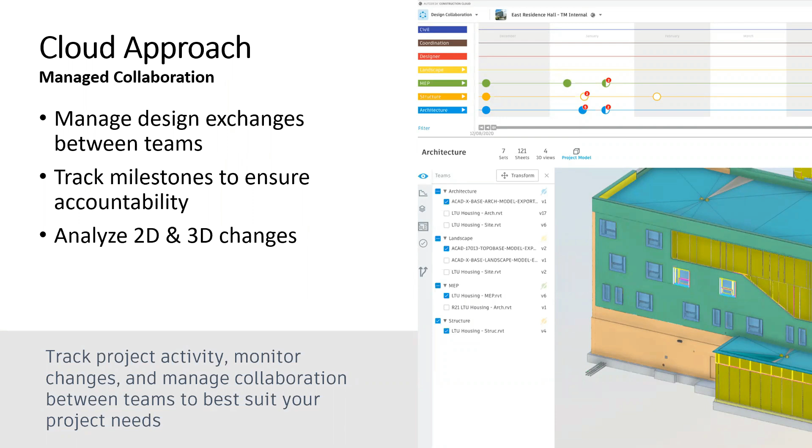So if we take a look at what that looks like from an Autodesk Construction Cloud perspective, that's the Design Collaboration module here. If we imagine a live project scenario, we've got our folders set up, the teams are working away and they're publishing their models into the cloud, whether it's DWG files or Revit models, Plant 3D, Civil 3D, etc. They're all working away in this common data environment.

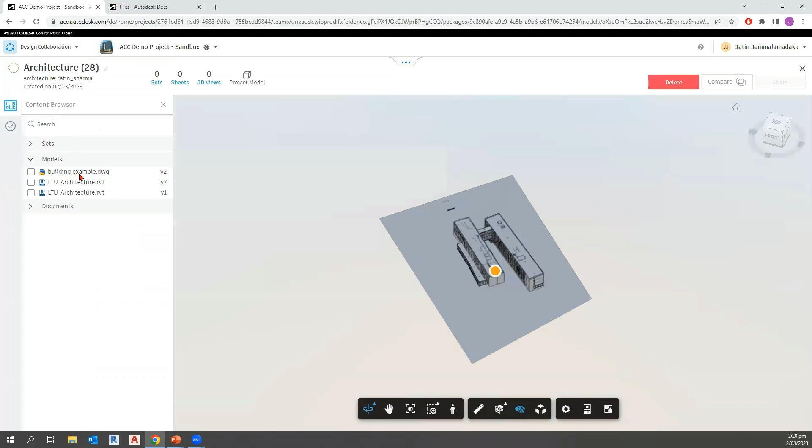And if I click on the models section here, you can see I've got different models available. It works with DWG, works with Revit, works with Civil 3D and Plant 3D. So this is my Revit model, for example. I can take a quick look, make sure everything's okay. I can do things like measure tool, section analysis, etc.

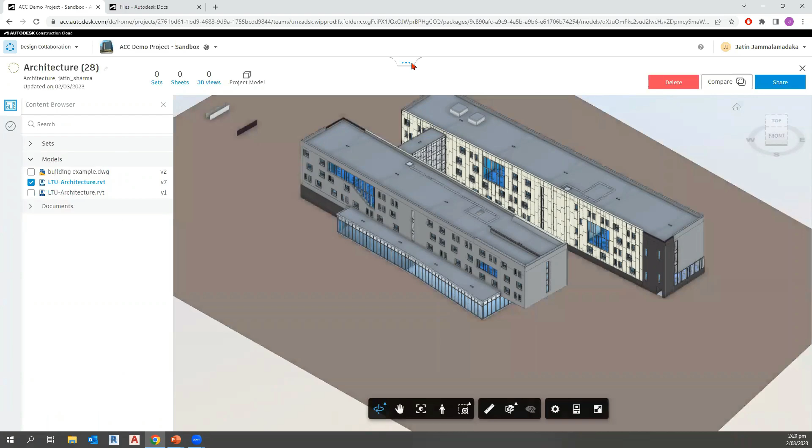And if I'm happy, I can just click on this little square and hit the save button. When I hit the save button, it's going to go ahead and save this package. Now, if I look at this timeline symbol, you can see here under the architecture stream, I've got a node here which says, hey, you've created a package on the 2nd of March, 2023.

If I hit the share button, I can give it a name, I can give it a description, and then once I hit the share, this will now update to say to all the other teams, hey, architecture has shared their model, it's time for everyone to take a look at it.

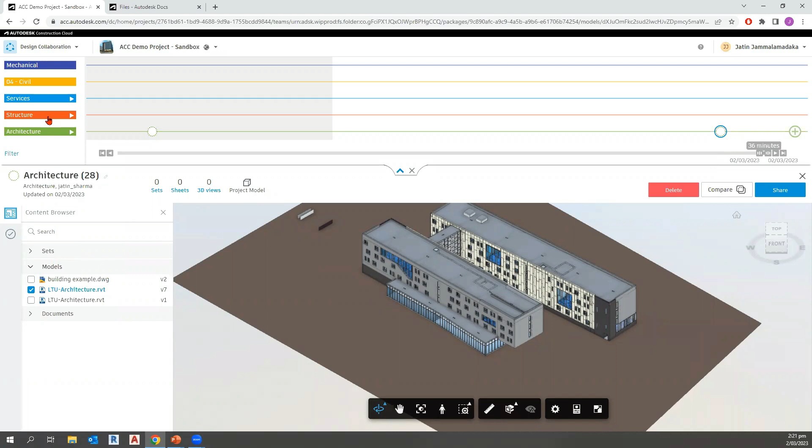So what would happen is that, let's say I was part of services. I know that architecture have shared their model. Let's go back in time a little bit, let's say that they shared on March 24, 2022. I can click on this node, so this package, and take a look at what they're sharing.

I'm doing all of this in the cloud without corrupting my model. I can click on this model. I could even, if I wanted to, hit compare. And what compare does is that it helps you visualize changes between the last time, for example, architecture shared their model with their latest version, just to verify if everything's going correctly.

So I could hit this compare button over here, and I could say, well, you can see here between version 4 and version 5, there aren't any changes. So I wonder why the architecture team are sharing their new version. I could go back in time if I wanted to as well, and say, well, what's the difference between version 3 and version 5? So the model that they shared on the 22nd of April, as opposed to the model that they shared on the 24th of March. Let's take a look.

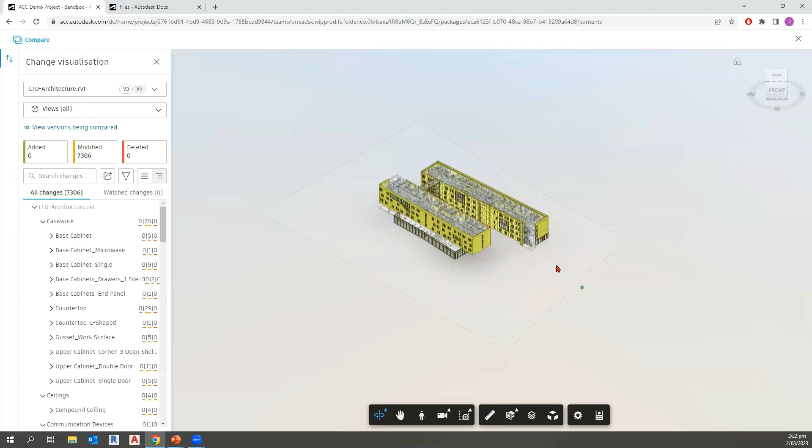So I can click on show changes. Again, I'm doing all of this in the cloud, right? So this is why this cloud-based approach is so appropriate. I'm being able to analyze, slice and dice my data without actually having to go into something like Revit or Civil 3D, etc.

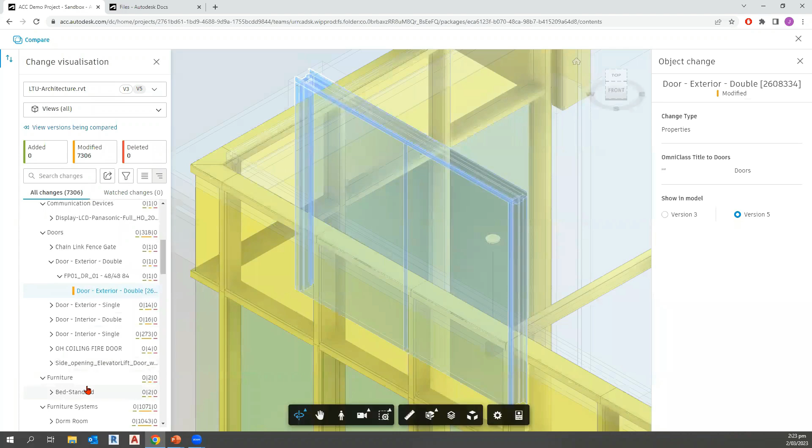So I can see here there's about 7,000 different objects which were modified. I can go take a look. So I could click on any door, for example, and see what was changed. I could take a look, for example, this bed got changed, etc. I could even go backwards if I wanted to. So if I click on this compare again, let's go all the way back to version 2.

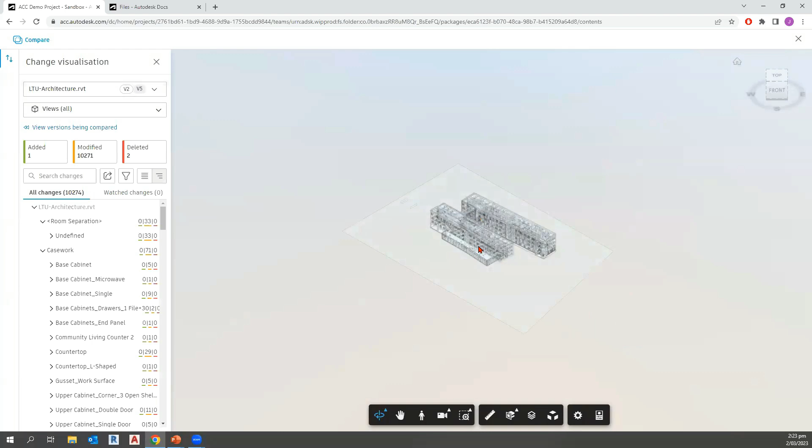For example, there's about 10,000 changes here, and I can hit show changes and it will start calculating all of this in the cloud. Again, hardware requirement is not a problem because it's all happening in the cloud. I can see between version 2 and version 5 of the architectural model, about 1 component got added, 2 got deleted, and 10,000 other objects got modified.

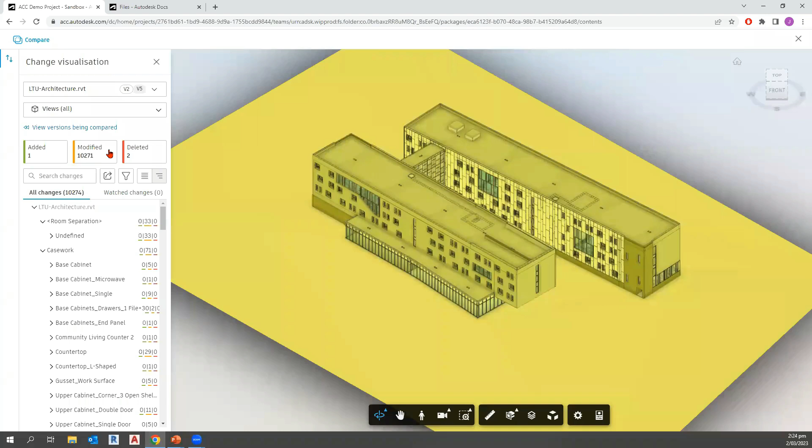If you take a look at this model, if I had to manually figure out what exactly got added, it would take me forever. But I can just uncheck these 2, and I can say, well, I want to know what actually got added. And that was just this 1 door here. So there was this 1 door change in this entire model. The cloud environment has enabled me to figure out what got changed.

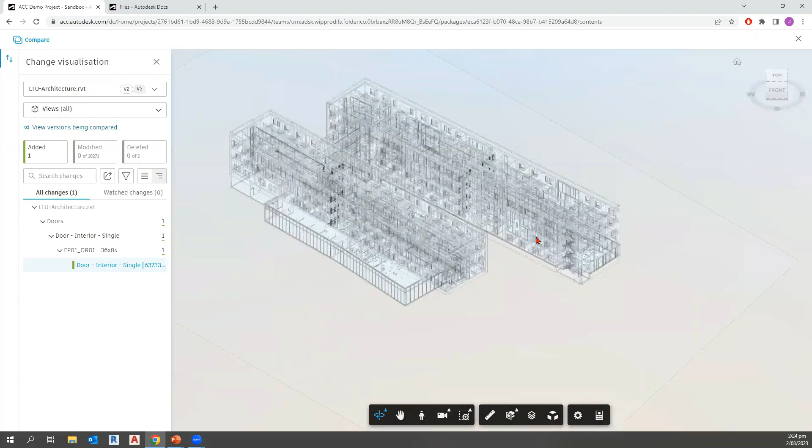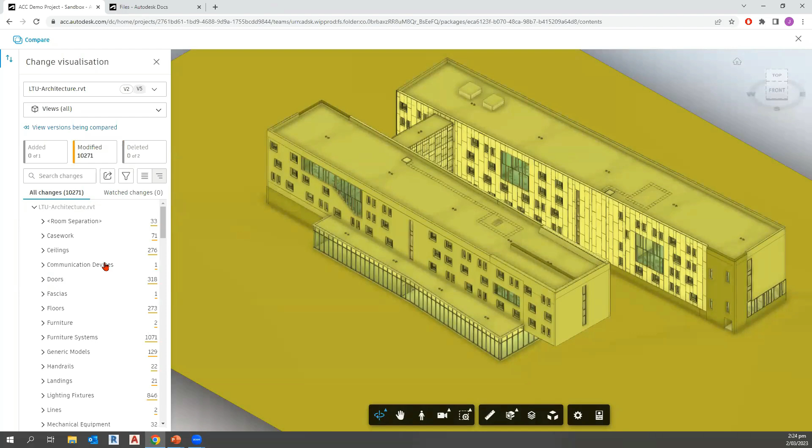Similarly, same thing with deleted. So these 2 water coolers were deleted in the latest version, but they were showing in version 2. If this feels a little bit overwhelming, like, let's say I'm really interested in modified, but there's 10,000 different things that are being changed, well, how can we make this a little bit better?

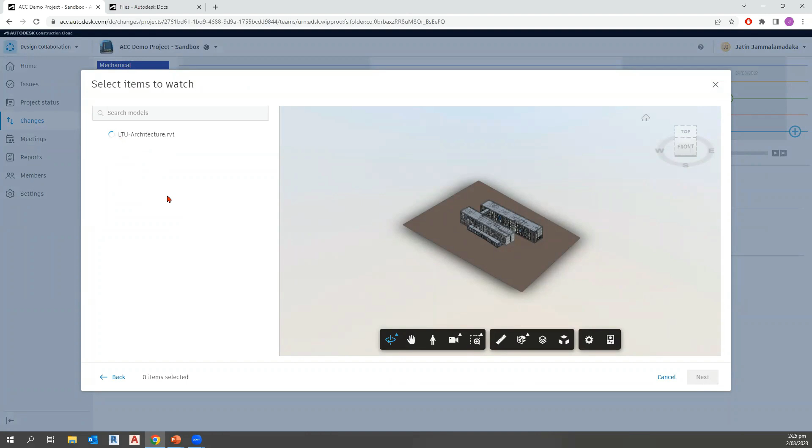One of the things you can do is leverage something called changes over here. So you can create something that we call watch groups, where we can say, hey, I'm only interested in, for example, the architecture model, and I'm only interested to know if certain parts of the architectural model are being changed.

So for example, if I'm only interested in, let's say, foundations or even walls—okay, I'm only interested in the walls. So what's happening here is that I can select all the walls, hit next, and the next time any changes happen to these walls, I'll get a notification.

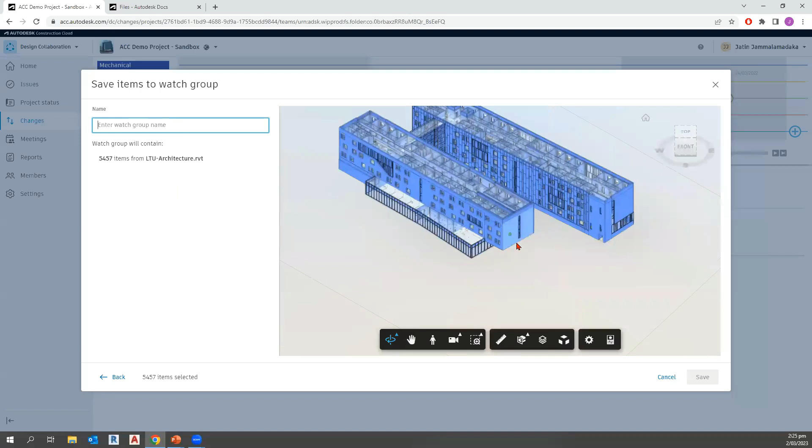So you can take a high level using the compare button over here, or you can dive a bit deeper using changes and creating a watch group. And once you've created some of these watch groups, you can even incorporate it back into your BIM meetings as well.

That's how design collaboration at a high level typically gets used. If you're worried about wanting a little bit more automation—I want to know, for example, when the structure team or the architecture team are sharing their model, because we don't get notifications of this—that's a big problem, you can leverage this button here called email notifications. If you turn this on, you will receive an email every time a package is shared or consumed.

So if you wanted to, you can start introducing some of these automation tools, such as email notifications. You can also introduce another automation tool, which is around schedule publish. You can turn this on and it's a controlled permission, but if you do, you can schedule it to say, well, every Thursday I want the system to automatically publish what we've done, let's say at 3 p.m. on a Thursday, automatically publishing what we've done in Revit into design collaboration. So all this now is becoming available, which wasn't possible using the traditional approach of shared drives or local servers.

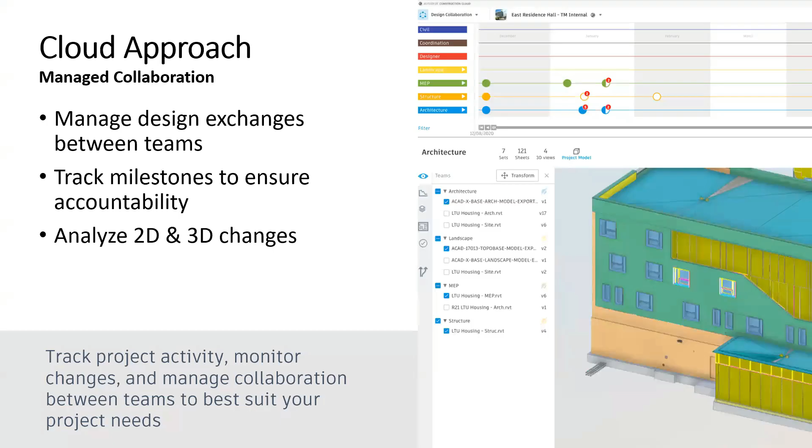Now that we understand the BIM models are in the cloud, and like I said, it works for Plant 3D, Civil 3D, not just Revit, once all that's in there, the entire project team can be involved in the clash detection and resolution process. You can identify issues and try to solve them without waiting for coordination meetings. The cloud environment automatically detects clashes whenever the models are updated, groups them by objects, and from there you can create and assign issues. The module responsible for this is called model coordination.

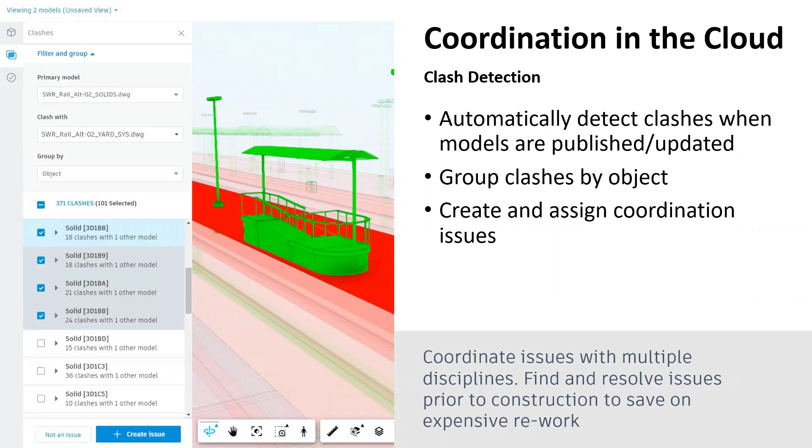There's a bit of miscommunication around the model coordination workflow, so I thought I'd create this graphic to use. From a workflow perspective, you have your different consultants, and what they do is upload their models into the Autodesk Construction Cloud environment. When they do this, the cloud environment will automatically start conducting the clash detection process—as soon as the model gets updated or uploaded into the environment, the clash detection process starts happening.

So once that happens, and you grab a cup of coffee and come back, you can start to view all of the clashes in real time. Once you do this, you can decide: can I resolve the issues I'm seeing in the cloud clash detection process? If yes, I can just upload a new model, it will go through this process again, and I can check to see if that's resolved the issue. If I can't resolve the clash issue, then I need to create an issue in the cloud and discuss it at the next coordination meeting.

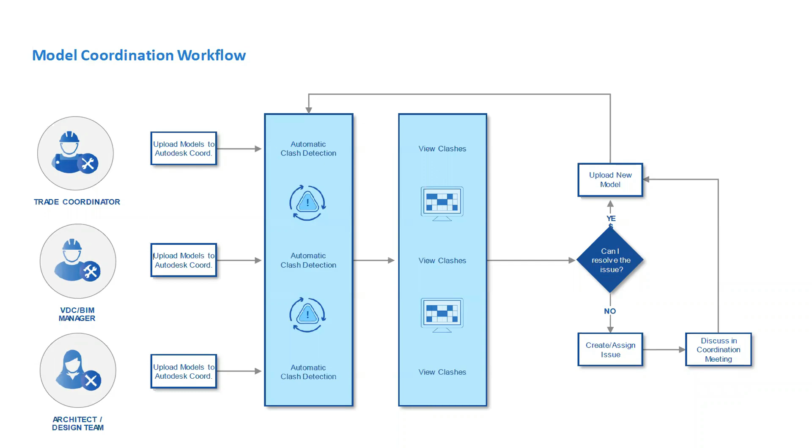Okay, so let's take a live demo of this in action. I'm just going to jump back to my project here.

So again, the module that we're interested in is model coordination. The teams are working away, they've uploaded their files, and while that's happening, model coordination in the background is grabbing all of those files and conducting clash detection processes.

So you can see here some clashes happening already. This is at a high level, but I can click clashes over here, and that's going to give it to me from a card perspective.

For example, if I hover over this card here, it's saying there's about 67 clash groups between the services fire coordination as opposed to the architectural model. There's 44 issues between the rest of services and fire specifically, and there's 2,000 issues happening between architecture and services, etc.

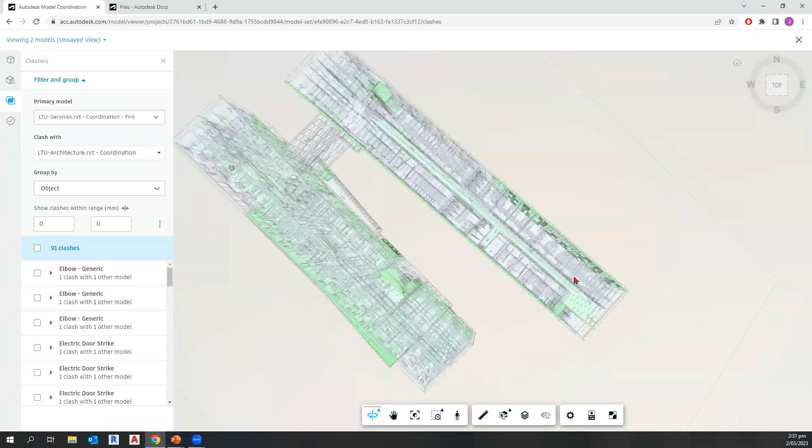If I'm interested in finding out more, I can just click on this card, and it'll load and start showing me the latest coordination data. So I've got my two models here.

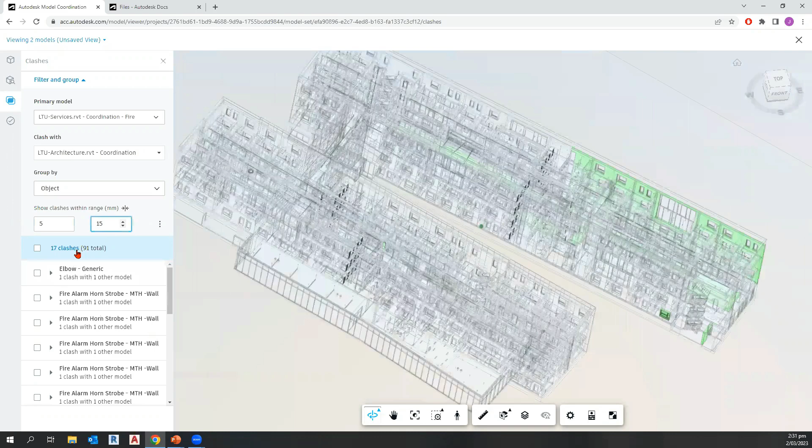I can group it by object, and I can say I want to show clashes either within a certain range, above a value, or below a value. So I might say I want to see all the clashes happening between 5 millimeters and 15 millimeters. You can see here that's changed it to say 17 clashes specifically in this particular range.

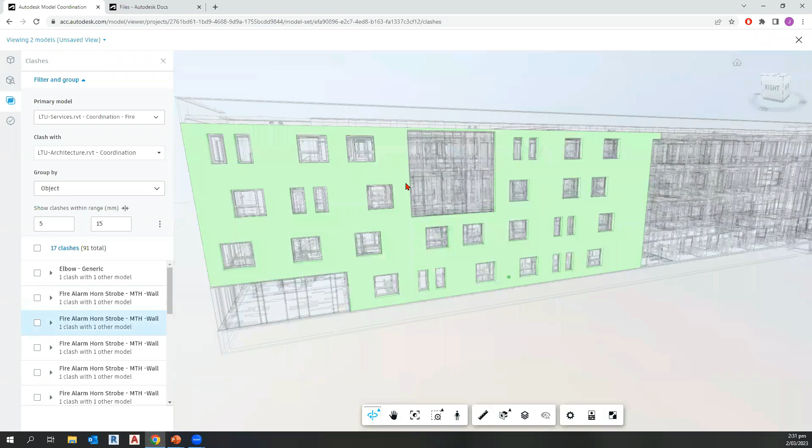Now, this is a big model, and let's say I'm interested in this fire alarm issue. So I can go ahead, click on it, and now I can take a look at what's clashing. I can go to this elbow issue as well, and say I want to see from 0 to 15, and now you can see that's changed again.

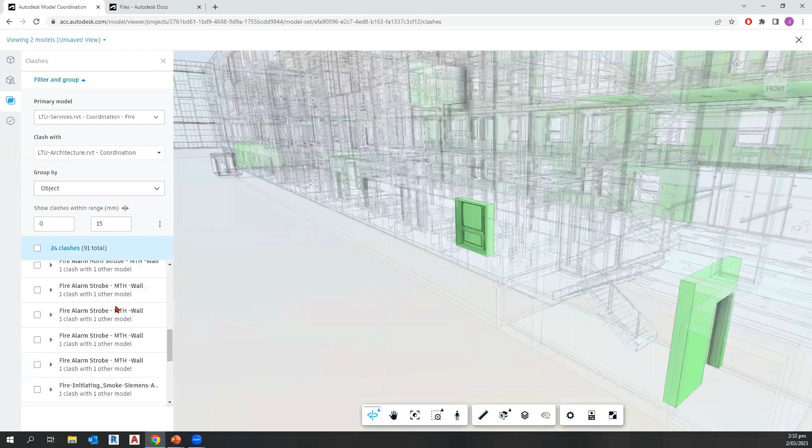If there's a particular one I want further assistance with, let's pick one — let's say there's a keypad issue here. You can see this keypad is cutting into the partition.

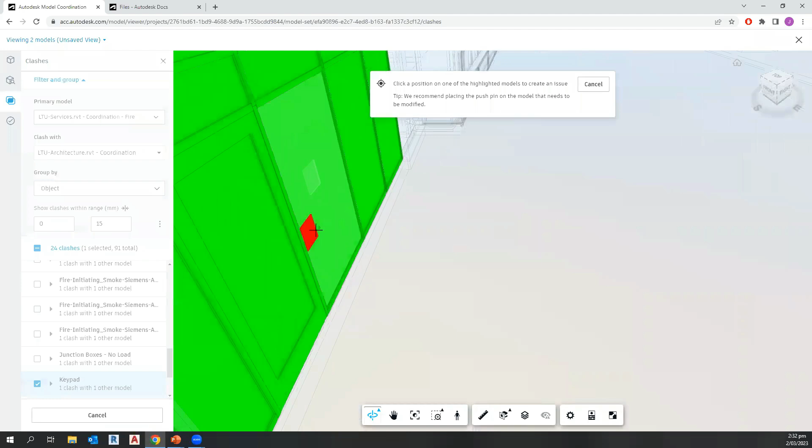If I wanted to, I can click on this and say, actually, I don't think this is something I can fix easily, I need to create an issue. So I would click on create issue, show the exact location of the clash issue, and it will go ahead and start creating that issue for me.

What it's going to do is grab all of this data. And when it comes up, I can give it — it uses some of this information already to help you create titles and types and descriptions, but you can edit those any way you want.

You can say this is something the building services engineer needs to take a look at, so I can assign it to the building services engineer. I can attach some additional information, but they're going to get a notification of not just a link to this issue, but a quick screenshot as well.

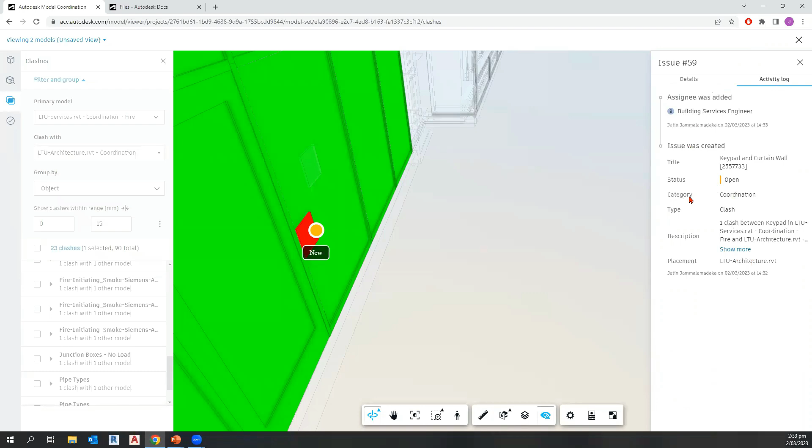So now this becomes a trackable issue. Now we have an activity log, so when they take a look at this and there's a resolution process, it all gets recorded in this activity log.

Again, if you're worried that this is a bit of a high level thing and you're not interested in all these other models, only what's relevant to you, that's fine. You can go up here to views and create particular views you're interested in. For example, I've got one for architecture and services, one for electrical versus fire. You can create these views and give them a privacy level — whether you want to share it with everyone in your team, just yourself, the whole project, etc.

So you can create your own custom views, similar to what we did with design collaboration, the watch group feature in design collaboration.

Then once you've generated some of those issues, you can go to the meetings tab and conduct your BIM coordination meeting in this platform, using the issues you've created and going through everything all within this platform. When creating a new meeting, you can also link things like your Zoom or Teams, etc. For example, I could give it a topic, items, attachments, and link in those issues as well.